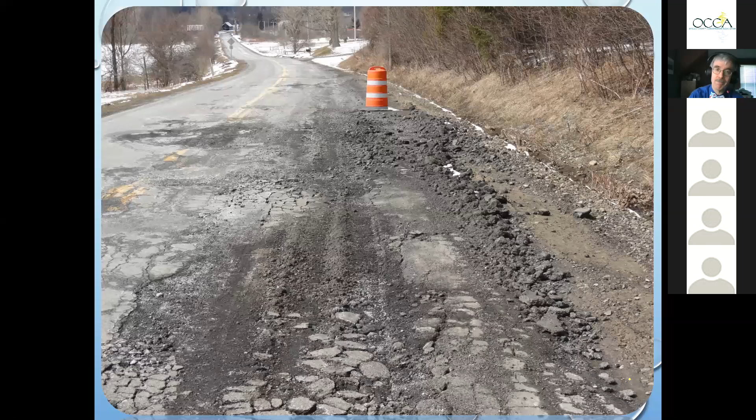They protect the roadway. If you think about a pavement as a schematic, a ditch can actually keep the water from getting into the roadway in certain situations. And the concept is to move that water away so the pavement stays dry, it stays stronger, and that's one of its primary purposes. But a ditch can also move water quickly and convey it, not necessarily in the way we want it to be maintained.

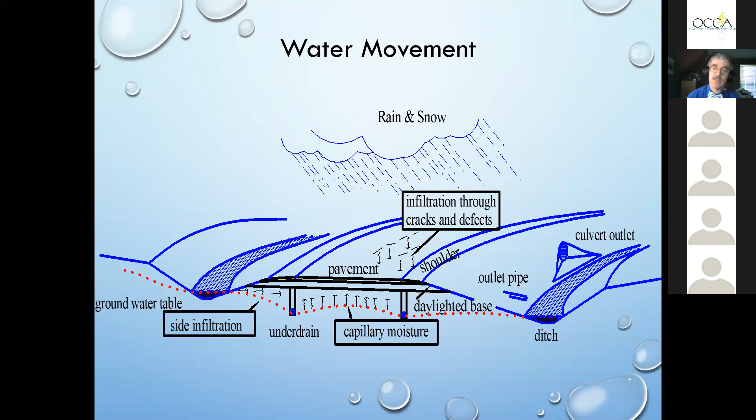It might be, and it might not be. It depends. It depends on what its purpose is. If it's only carrying surface water and the water that comes from the roadway itself, that's all you need. It's just a swale at that particular point.

Now, if you've got a water issue, you could actually have solved that problem by coming in here. We do this quite often on roads, and we put a subsurface drain, backfill it properly, and that keeps the water from getting to the roadway. And in that case, the ditch only needs to move surface water. It doesn't need to be very deep at all. You're draining the base with a subsurface drain, and then you just have to be wary how the water comes out of the subsurface drain.

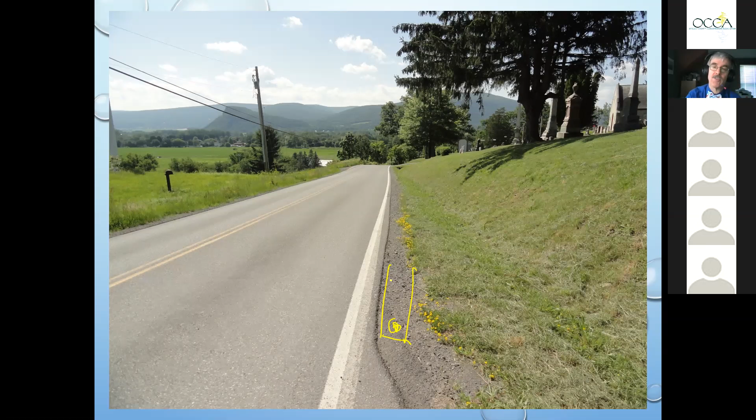Versus here's a road that I built when I worked over in Yates County, New York, near Penn Yan. If you've ever looked at a map of the Finger Lakes, there's one that looks like a Y. That's where Yates County is. Here's a ditch. It goes into the subgrade, the native material, okay?

And then it comes up about a foot of gravel, and then we're going to be paving it eventually with about another 6 inches of asphalt. So its total depth, by the time we're said and done, is going to be 24 inches. Okay, with a nice flat slope, so it's relatively safe. Is that ditch deep enough? 24 inches? Yes or no?

It depends. It always depends a little bit, but generally, yes. Most of the time, very few ditches need to be deeper than that. All you need, if you're draining the base of the roadway, in this case, you don't need an underdrain. You're draining the base directly to the ditch. All you need to do is get into the subgrade a few inches. There's no need to go deeper than that in almost any case.

And the few times where it is, the people doing the work, the highway departments, should have probably brought in the conservation districts or the soil and water districts. They bring somebody in to help make sure that ditch is properly sized, not too big, not too small. Most ditches are probably too deep. One of the challenges we've got, though, is the ditch needs to be clear and maintained.

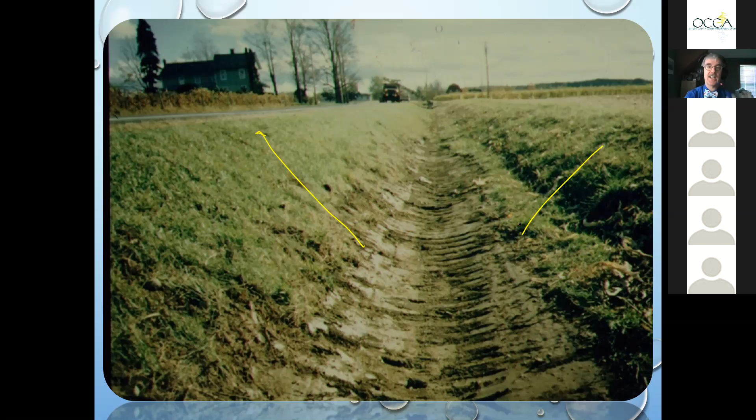And again, if you need help, you can always go get it. But that's a habit that's hard to get out of because you got this big machine and it can scrape. And so people tend to do this way too often. And that's not a really fun thing to do.

Now, we have a class we teach here in New York at the Local Roads program on drainage. And so part of the class, we did some calculations, and I got a little number for you. You all probably know about the universal soil loss equation. If you calculate the universal soil loss equation for the typical kind of glacial tills you see in most of New York State, 1 acre of land and 1 mile of ditch, by the way, have a very similar surface area. Okay, obviously it varies depending on the width and the depth of the ditch, but they're actually pretty darn close.

So you can calculate out what 1 acre of land has eroded before you can detect the erosion, before the rills start to form, or 1 mile of ditch. How much material do you think is washed away in 1 mile of ditch before you and I can detect it with our eye? And just to give a reminder, that's about the thickness somewhere between a dime and a nickel, maybe about the thickness of a penny. What do you think that is in terms of tons?

1 acre of land exposed, not protected, starts to erode. How much erodes before you and I can, with our eye, detect it? 10 to 12 tons. Okay. Any other guesses? And that's a pretty good one.

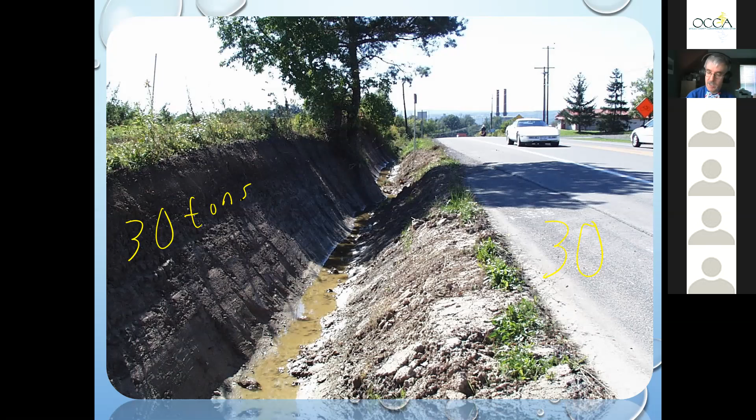So by the time you see this level of deterioration and erosion, you've actually got a lot more than 30 tons per mile. And of course, where is all of that erosion going to settle? It's going to settle out in our streams, our ponds, in the culverts themselves. It's going to be really where we don't want it to be, okay?

And by the way, the time between this photograph and this photograph was only about 2.5, 3 weeks. Pretty bad. What do you think the highway agency did in this particular case with that particular ditch? Do you think they just left it? What do you think they did?

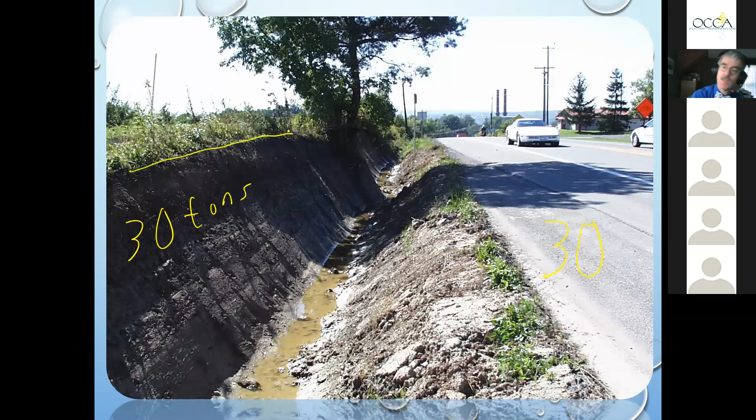They scooped it again? Yeah, well, they might have had to. They need to do something. One of the challenges to deal with is the right-of-way. They tend to not want to go outside the right-of-way, and the edge of the right-of-way was up here. What they actually did was they brought in a bunch of pipe, and they piped it all in because it was really too deep. It was actually dangerous. And they piped it all in. Of course, that cost a lot of money.

And that tree, by the way, survived. It's still there. I've walked by it in my morning walks during the COVID period. It survived. Life is pretty tenuous. I mean, not tenuous, pretty survivable. Does pretty well. But that's a lot of money, cost a lot. They should have really not touched it that deep in the first place.

What's interesting is if you can get good practices in place, your ditching rates go way up. You look like a hero to the legislative people because you can now do thousands of feet a day rather than a few hundred. But that's a challenge. So one of the things we wanted to know was how are people actually maintaining their ditches?

So Dr. Snyder here at Cornell at the Department of Natural Resources and a graduate student of hers named Anthony Johnson went out and surveyed, with a little assistance from us, the entire state of New York, all of the towns and the counties, which turns out to be just about 1,000 individuals. And a little over half replied back. I can get the exact numbers if you really care. And so I helped them with some of the analysis and some of the statistics.

And as you can see, we've got a pretty good range. We heard from every single county, at least one town or the county throughout the state, with the exception of Suffolk County, which is its own unique animal anyway, with the sandbars down there. And we got a sense of what people were doing for the various operations.

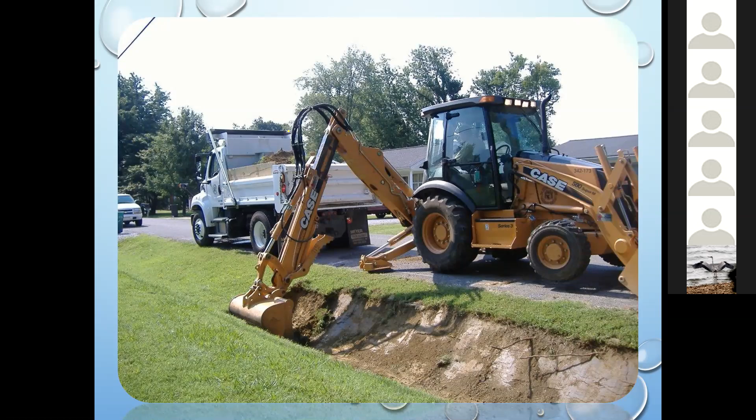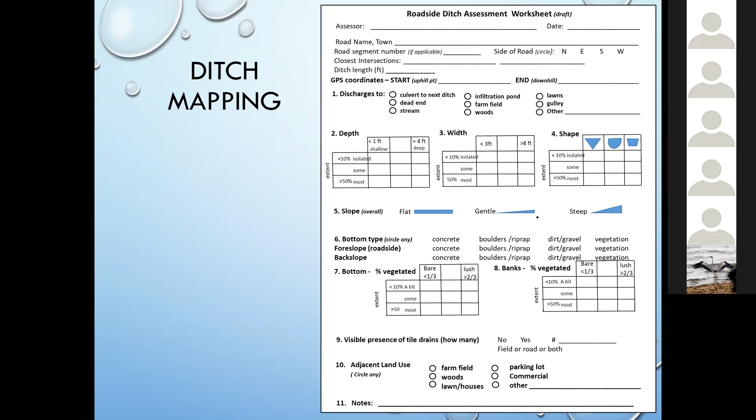Part of the reason we did all of this is, are there better ways to replumb? We've done some analysis on this, and maybe we could replumb, keep the ditches doing their job of draining the roadway or the roadside without losing the value that a ditch could provide if it's done right to hold and store the water, as somebody had mentioned earlier. So we had what we thought was a new choice out there.

So we had a project not too far outside of Ithaca on a County Road up here, in the town of Ulysses. And there's a farm. You can see the picture from above, and there's some different tiles that come out of the field. And you can imagine there's water flowing. Now, the picture on the top right is the ditch with the green arrow. It's pretty shallow. It's safe in terms of if a vehicle goes off, it's not going to create a major safety issue. So that's not too bad.

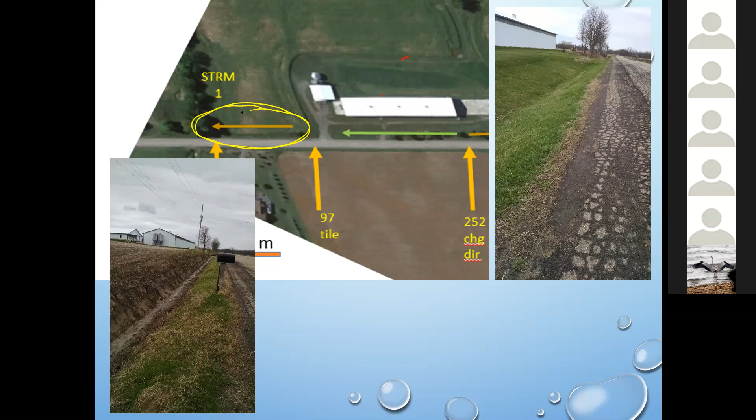But when you get to that stretch over here that I'm circling now, it gets pretty deep. It doesn't look like it where that mailbox is in the lower left corner, but that ditch is actually almost 8 feet deep at the outlet end. We surveyed it; if I'm standing in the ditch, the top of my head, I can't see the shoulder of the road. So it's pretty darn deep, and you really wouldn't want to go off that with a car. And so it's unsafe, and it's transporting a lot of fluid very quickly from the field.

And the farmer has field tiles, and those field tiles are putting out a lot of water. You can see there's quite a bit of erosion. So could we slow that water down while still keeping the ditch deep enough and protecting the roadway? And what we said was, yeah, I think we can. We can replumb that. Now, we want to make sure we don't create a flooding issue. There's a lot of water, and we want to be careful of capillarity bringing the water back up into the roadway.

But what we said is, instead of putting a subsurface drain parallel to the roadway ditch, which is the common practice when you refill them, why don't we put in a series of flat subsurface drains? So what you're looking at here is a quick schematic we drafted up real fast. Each of the black lines is a subsurface drain, and we just lay them out so that they're flat. They actually hold water. They're almost like a detention basin built into the ditch.

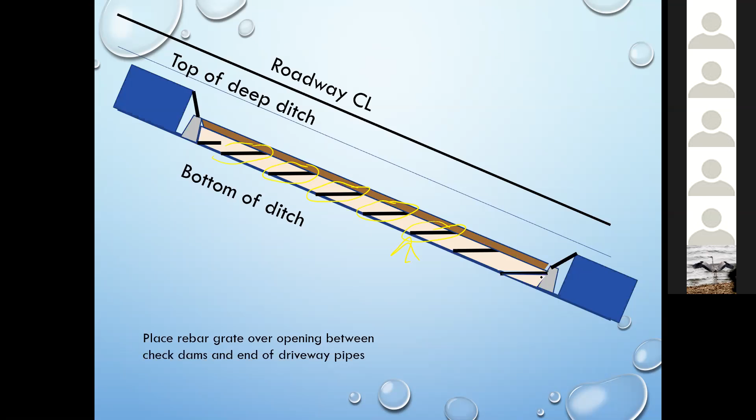We put in a check dam at each end made out of riprap, and essentially tried to slow the water down. But by using sand, we could do some capillary breaking and keep the water where it belongs, and hopefully shallow it up quite a bit. So this is during the operations. They scraped all the vegetation away. They put in the check dams. They backfilled it all with sand.

And you can see in the lower right, there's the subsurface drains. We didn't use any fabrics, just sand. Sand is actually a pretty darn good filter. Works pretty darn well, doesn't go into the pipes. And then the people with the county came up with some ideas to protect the sand until they could get vegetation. So they just layered it with a thin layer of stone. Okay, so you can see what it looks like.

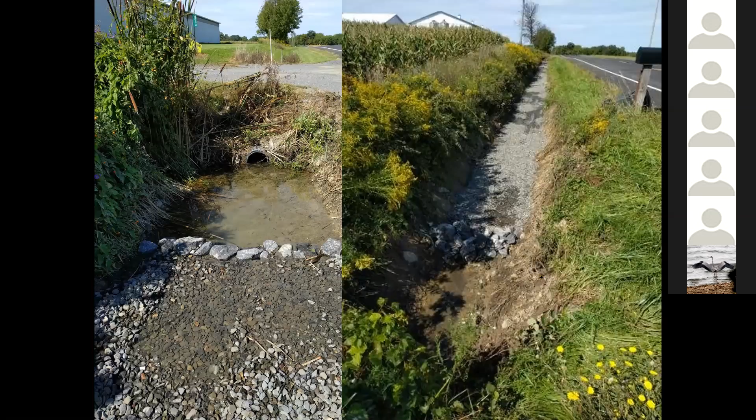So at the deep end, it's still, as I say, deeper than I'd like. It's about 4 feet now. I'd really like to get it down to closer to that 2 to 2.5 feet that we saw in the earlier picture. But the nice thing about this is, at least if a vehicle goes off on this particular stretch of road now, it's not going to flip. Okay, so it's going to just stay down into the ditch. They'll walk away. So it's an improvement in safety.

It seems to be holding the water back. It's obviously holding the water back enough for cattails to actually grow. And we think it's an alternative. As people are doing their ditches, they can make them shallower, safer, and at the same time, hopefully, we keep that water on site and protect the environment. So we get a win-win out of it. We didn't get our ditches like they are now in a couple of years. We got them there over a couple of decades. It's going to take time to come back out of this, but we think this is a way to do this.

And in addition, some of the work that Dr. Schneider's been working on are biosocks and biofilters that you could actually put in the ditch. They can actually pull some of the phosphorus and other chemicals out. And you can actually put that into an operation like this very, very easily. And so that's what we're looking at for future activities.

And with that, just to have a little bit of fun, we do a cartoon strip here with our quarterly newsletter. We actually did one on ditches. So we put one out. We call them the pothole potentate, to give people information on what they should be doing on ditches with best management practices. And that's what we're really trying to do, is get people to use best management practices.